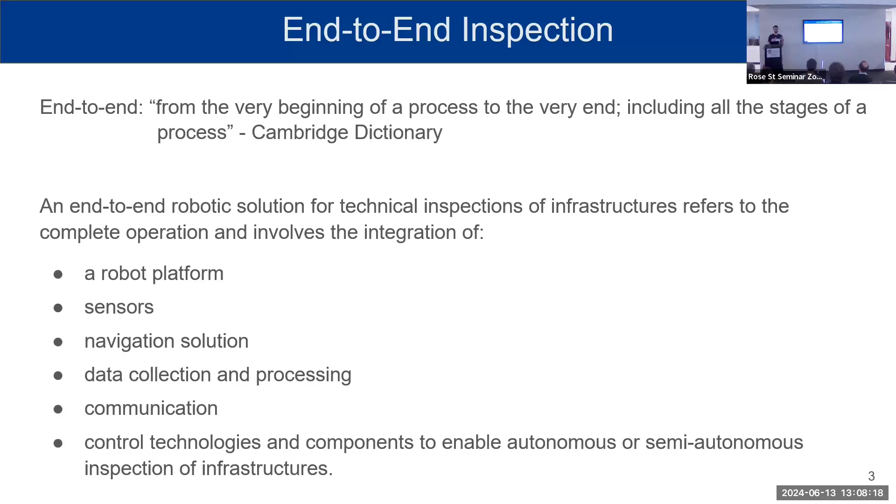If we look at the Cambridge Dictionary, end-to-end refers to something from the very beginning of a process to the very end, including all the stages of a process. In the context of end-to-end robotic solutions for technical inspection of infrastructures, it refers to the complete operation from the selection of the appropriate platform, sensors, and so on. It's also about designing the right navigation and control solutions and how to efficiently and reliably communicate between the platforms and the surveyors. So it's really about having all the components of the solution together.

More precisely, for ship hull inspection, it again starts with the selection of the appropriate underwater vehicle and sensors. It includes all the data collection methods and processing in order to correctly document the hull condition and the structural integrity of the hull. Similarly, it's also about establishing the correct communication links between all the actors during the operation: the autonomous agent, the surveyors and operators. And it finally ends with a way to support and assist the surveyors in decision making by creating reports about the condition of the hull.

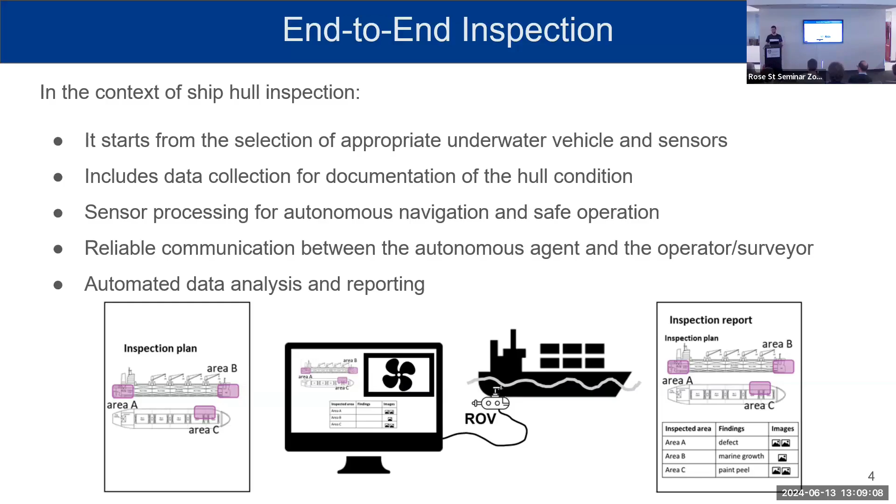So very briefly, I will first talk about why we actually need to inspect ship hulls underwater, then provide some objectives and results, and finally some conclusions with potential future work.

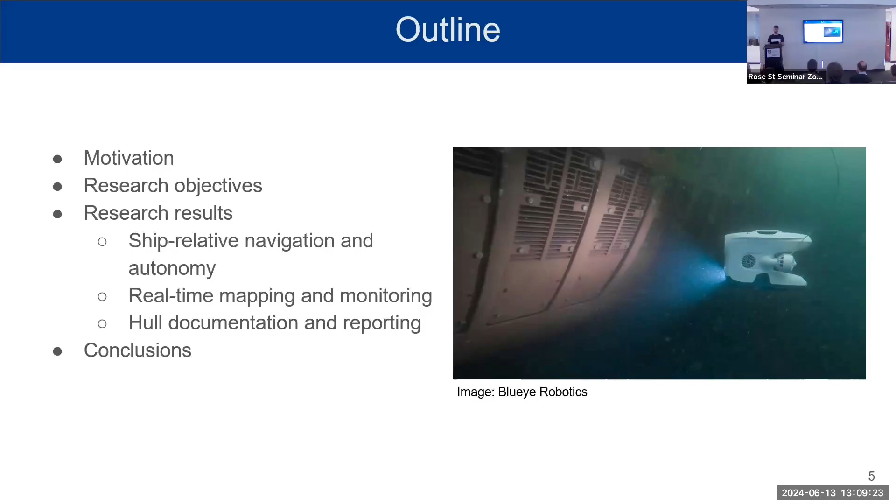For the motivation, as you might know, today there are approximately 56,000 medium and large ships navigating the world's seas, and they compose the maritime industry that has become a crucial part of the world's economy. According to the United Nations, more than 80% of global trade relies on ship transport. But when we refer to the shipping industry, we also refer to most of the activities done at sea, which also includes the transport of people, products, or goods.

And the ship owners are required by international regulations to perform regular inspections. This is because when the ships are navigating around the world, they are exposed to the environmental conditions of oceans, which can be very harsh to them, and over time can lead to structural degradation, such as cracks or biofouling, which really impacts the operations.

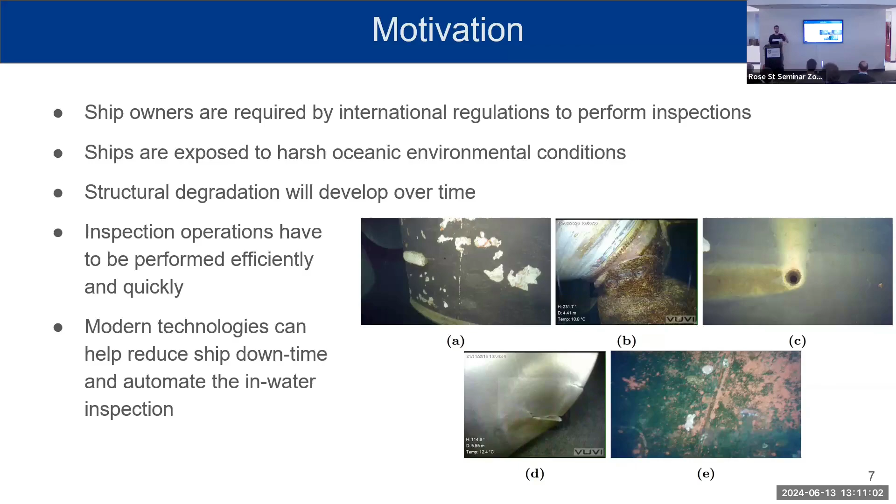Traditionally, the inspections are done in dry docks, which take a lot of time and cost a lot of money. So there's this need to improve this process so that it can be made more efficient and quicker. Luckily, with modern technologies, we can help reduce this downtime of the ships by automating the in-water inspection. But of course, there are a few challenges that come with it.

First, because it's underwater, it can be very challenging sometimes just to navigate and to account for the weather and all these things. But also because there is a very large variety of ships. If we want to provide a solution that can work in practice with many different ships, we have to consider that there's not only one ship with one size and one shape. We also want to comply with the rules and regulations from international organizations so that the solution can actually be used by surveyors and class societies.

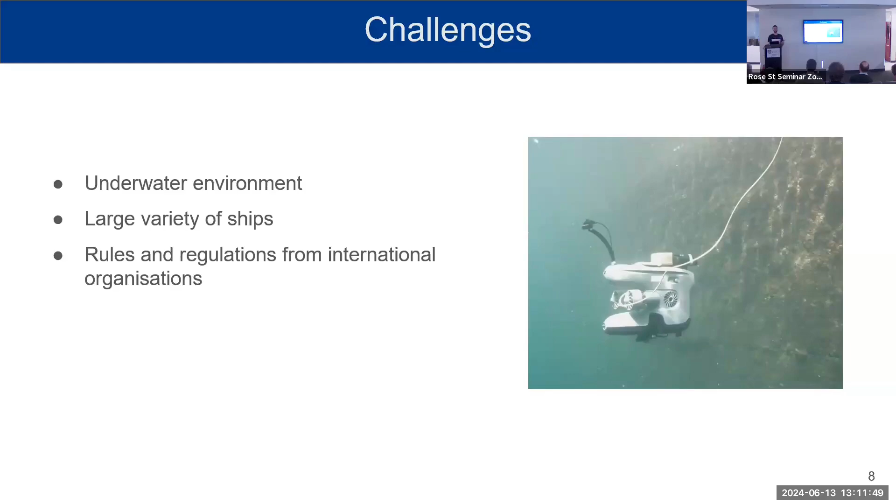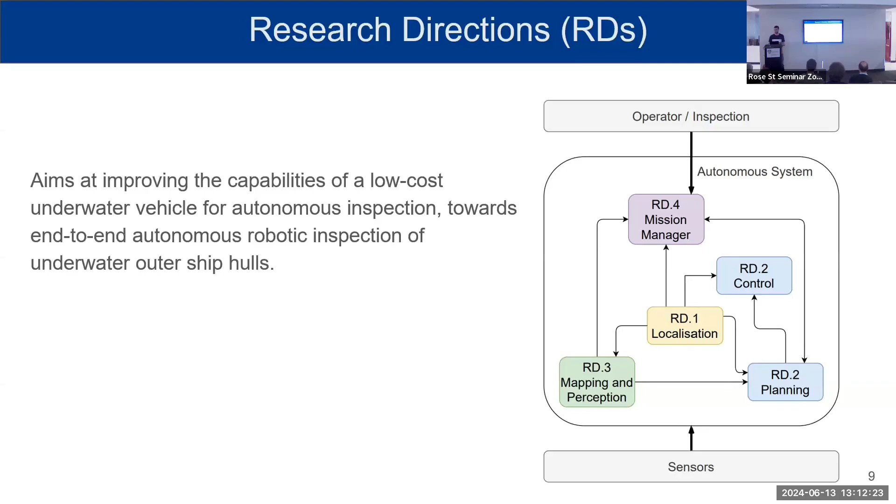So during this project, the global objective was to really improve the capabilities of low-cost underwater vehicles in order to inspect autonomously the underwater outer ship hull. For this, there are several parts that come into play, from the management of the mission to the low-level control of the vehicle to navigate along the hull. We can divide this into 4 different objectives that were my main objectives during my PhD.

First, it's really about planning and control: how can we efficiently plan the path around the ship so that we can fully inspect it? Secondly, it's about detecting the actual faults on the hull and the different ship parts that surveyors are typically looking for. The third one is about providing more insights about the ship parts that we inspect. For this, we try to combine the sensors that we have available, a monocular camera and a sonar.

And the last one is really about creating an end-to-end solution that can be used in practice by the surveyor, so that it becomes possible to monitor, document, and report the hull condition.

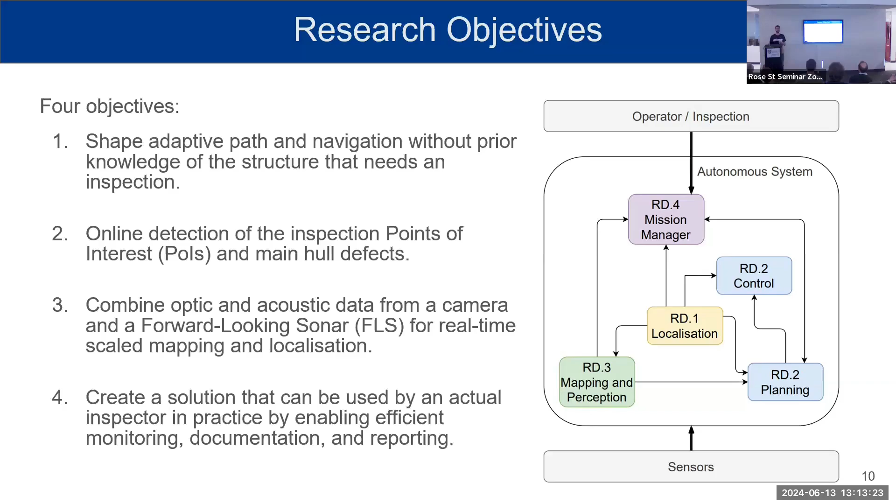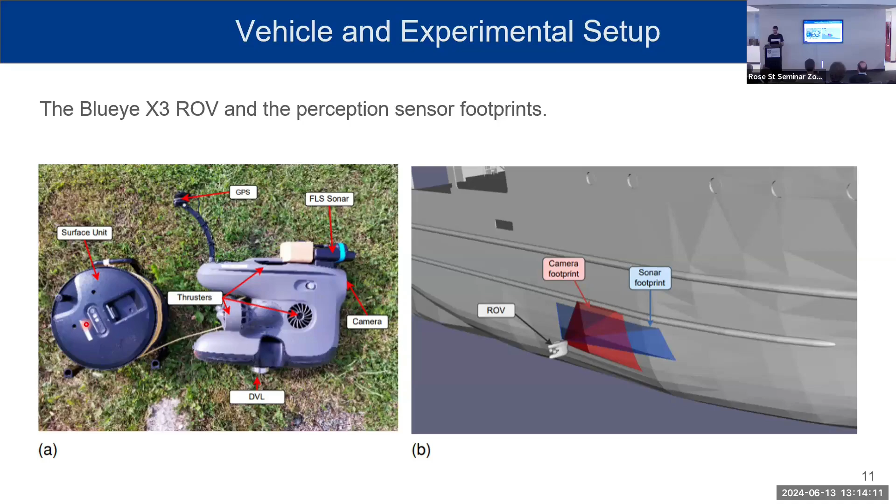Important to note is that the vehicle is connected to the surface unit here, which establishes the connection and communication between the autonomous vehicle and the surveyor. On the right, you can see the perception sensor footprints when it's facing the ship hull. Very briefly, I would like to present what a forward-looking sonar is.

Basically, a sonar works in a specific way. It emits acoustic beams with fixed vertical opening angles. Then it measures the signal strength and the time difference between the signal emission and its reception; by measuring the time of flight, you can estimate the target range. And because it has a beamformer, you can also determine the horizontal angle of each beam. Unfortunately, it's not possible to derive the vertical angle.

If we look at the figure on the right here, we would have multiple beams like this, and for each beam, we would have only one value for each range. So in the end, that's why we obtain the 2D image that we have here on the right.

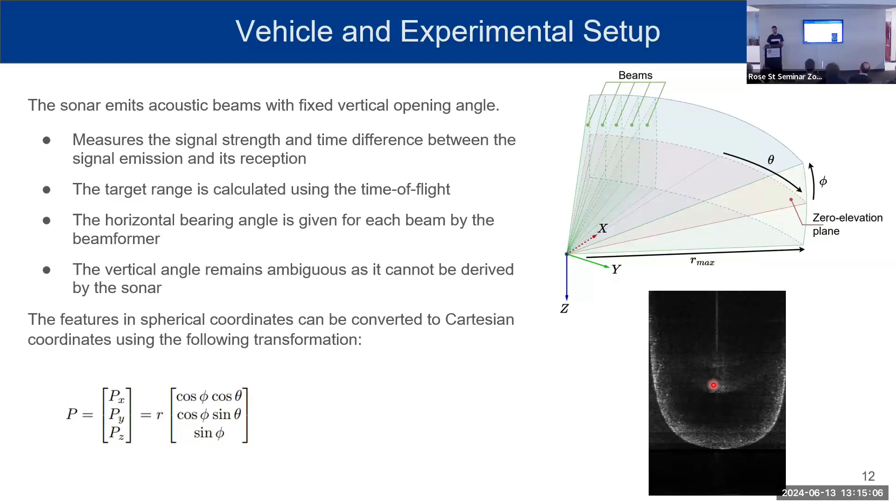Also, during this project, I was very lucky to be able to access many different harbors and ships around Europe. This really enabled extensive testing on many different ships of different sizes and shapes. A few examples: I was able to test in Norwegian fjords on research vessels, but also on cruise ferries in Greece or even a NATO warship in Portugal. This really made it possible to provide a solution that can work and adapt to different ships and conditions.

Right. So now, of course, the first step is to be able to localize the vehicle when it's underwater. So I'll be very brief about this because we actually use an existing framework for this called MaRS, but we extended it for underwater applications by handling more sensors that are related to underwater navigation. But it's actually a very useful one because it handles measurement outliers and outages, which can occur quite often underwater with some of the sensors, but also it provides some online extrinsic calibration of the sensors and some uncertainty measures that we will use later on.

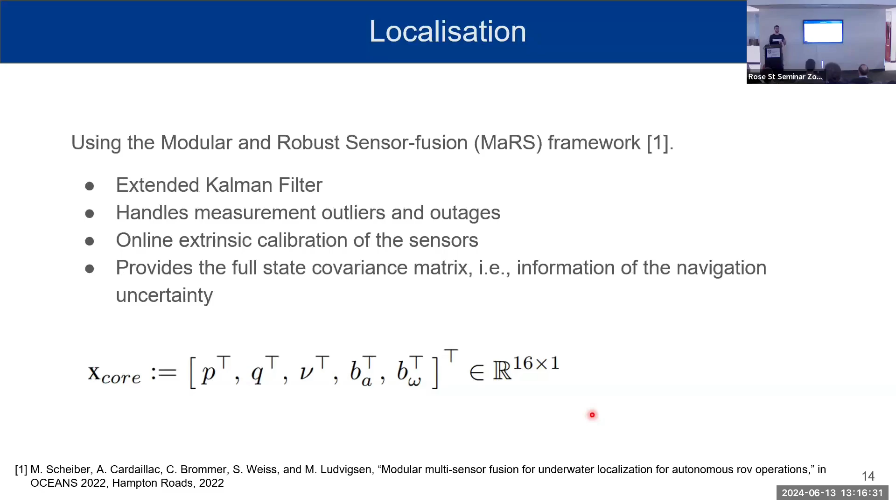But perhaps the most important part here is how do we actually plan a path around the ship so that we can efficiently inspect it. So we have to take into account the constraints. Of course, we want to be able to visually cover the hull so that the surveyor can take note or assess it visually. But the constraints we have is that we don't know the shape of the hull prior to the operation. And also, we need to be always facing the hull and ideally at a constant distance and with a low speed so that all the images we have are consistent.

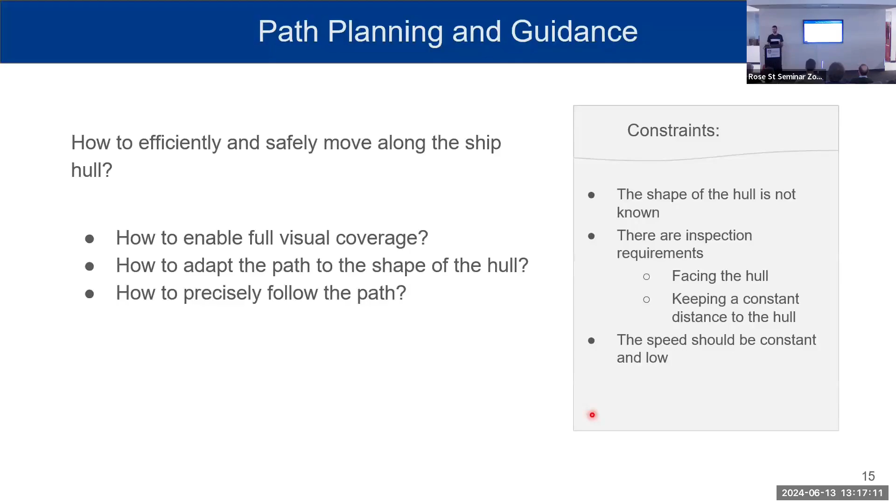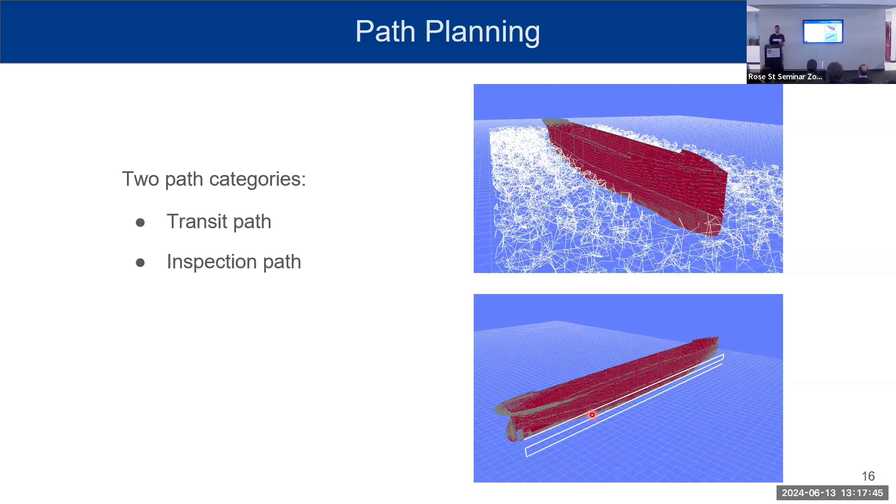So first, we actually define two types of path categories. We have the transit path, which corresponds to the path the vehicle has to follow from the deployment point to the ship, because we want this end-to-end inspection. So as soon as the drone is in the water, we just don't touch anything. So the idea is just to create this path so that the vehicle knows where to go to reach the ship. And the second one is the actual inspection path, so the path the vehicle has to follow to perform the inspection.

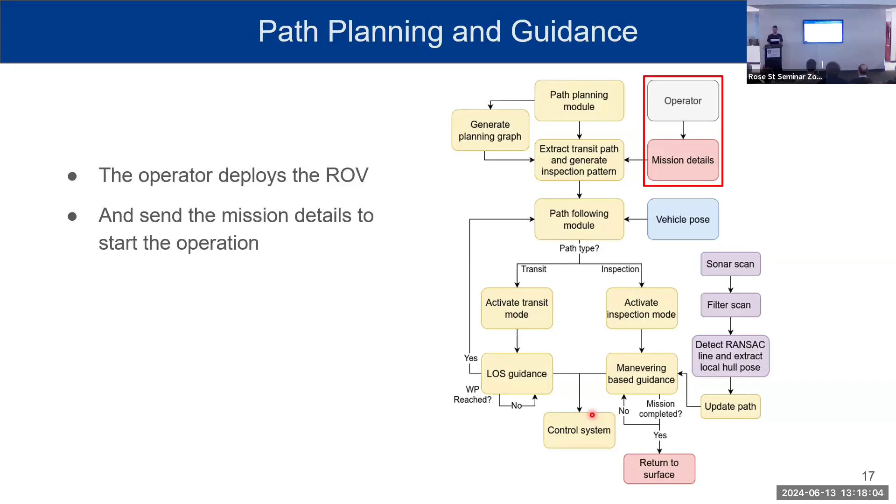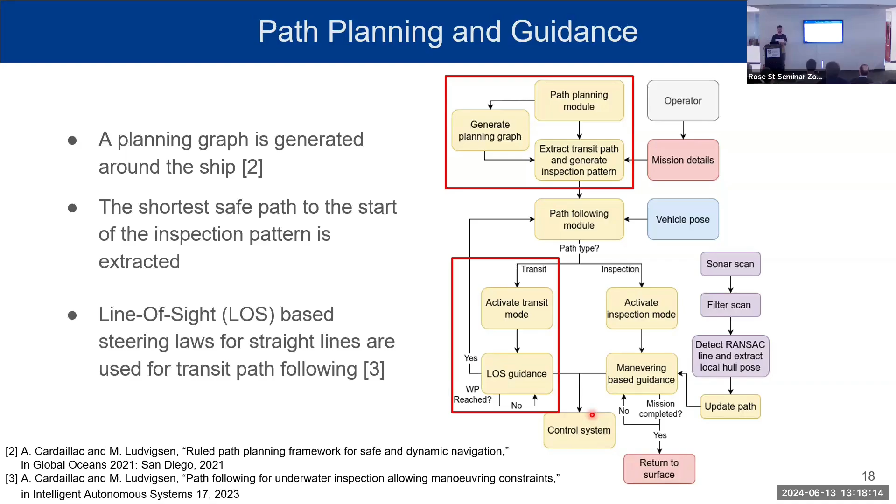So as I said, the operation starts as soon as the operator deploys the ROV and then sends the mission details, which are the location of the ship and the region of the hull to inspect. And then the ROV follows it after generating a planning graph around it that we saw in the video before, and simply extracts the shortest path to the start of the inspection pattern, and it follows it using line of sight guidance. But here, more importantly, is how do we actually plan the path for the inspection?

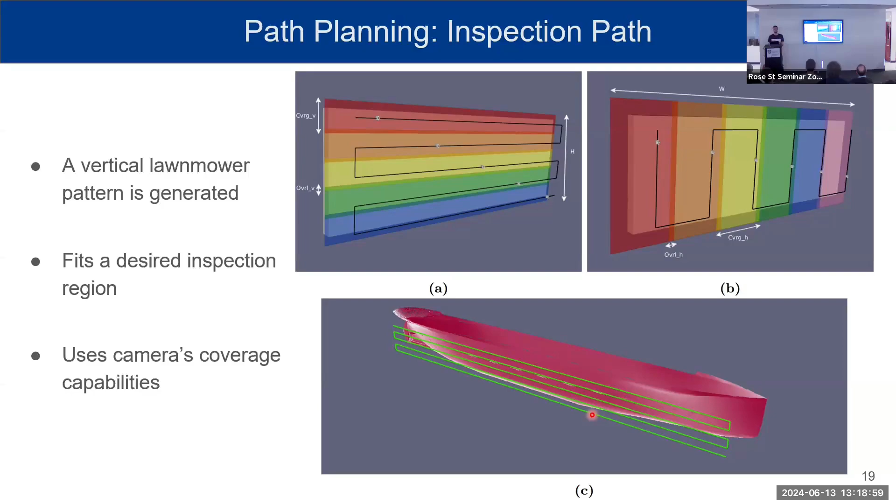So as I said, we don't know the shape of the hull. So first, we generate a vertical lawnmower pattern, with either horizontal slices or vertical slices, depending on the shape of the hull, and depending on what kind of inspection we want to perform. And it's designed to fit the actual desired inspection region and takes into account the camera's coverage capabilities, so that we can have some overlap, for example. But the hull is not flat, right? So we need to update this path as the vehicle is moving. So for this, there is a specific mechanism that is based on the sonar.

So the important part here is the detection of the hull using the sonar. So remember that we have this assumption that the hull is locally flat. And because of this, it becomes possible to say that we should expect an acoustic line in the sonar data. And this acoustic line should provide information about the distance to the hull and its orientation.

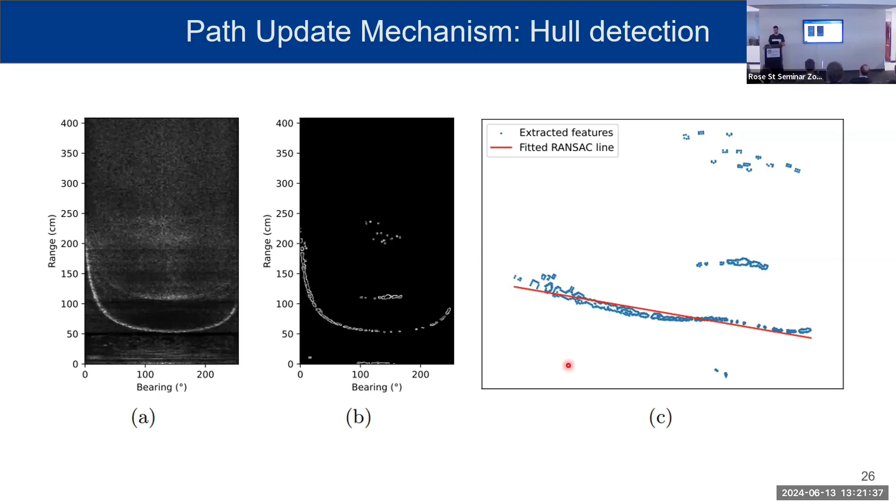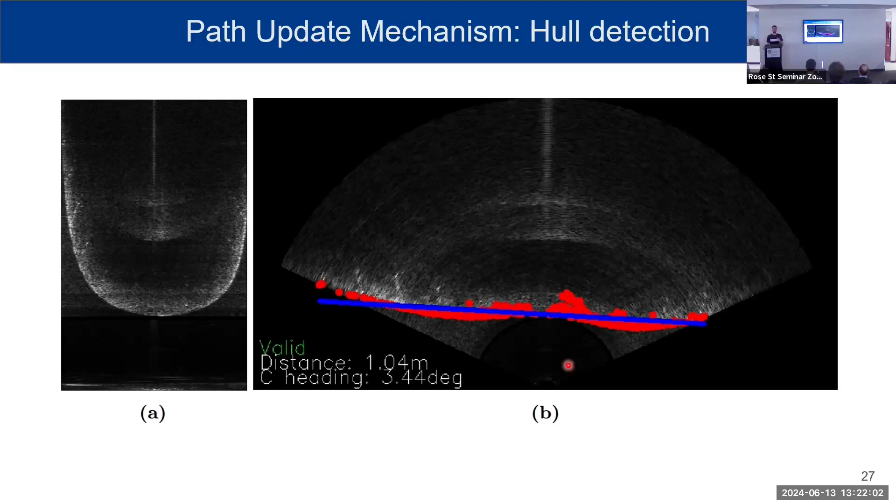So another example here with, on the left, the sonar data, and on the right, how it looks like during the operation. So we can have the raw sonar data in Cartesian coordinates on the right, with in red all the extracted acoustic points, and the blue line is the detected hull. And you can see on the bottom the detected estimated distance and relative heading.

Right. So now, compared to the previous path, we don't want to use line of sight anymore. And that is because we want to have better control at slow speed, but also we need to be able to specify more accurately the speed along the path. And so for this, we use a maneuvering-based guidance, which is based on constant bearing nonlinear approach, which also provides some components to compensate for some of the errors. For example, for inspection, the errors in depth and heading are especially important because we always want to have visual coverage of the hull.

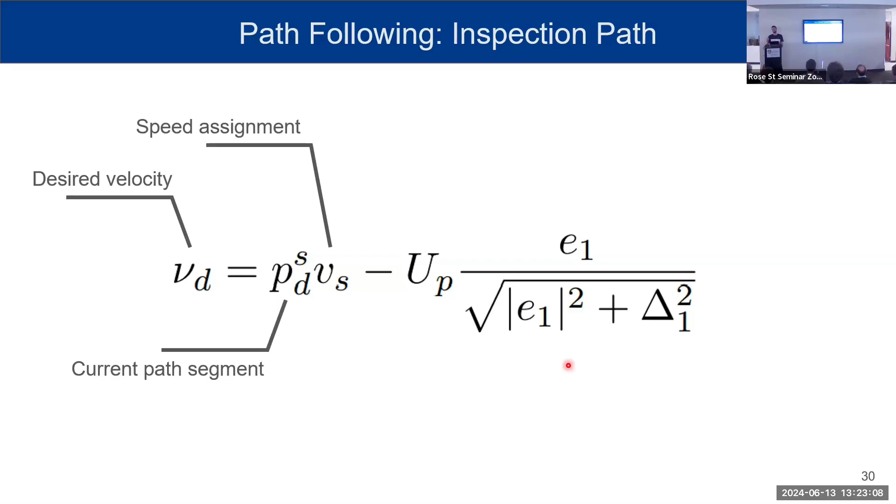So I'll just quickly go through this equation so that you can understand what's the idea behind. So we want to have a desired velocity along that path, which is defined based on a speed assignment, which corresponds to the speed the vehicle should have at each specific point of the path. I will go into details of this specific speed assignment later. And the second part of the equation is the constant nonlinear bearing approach, which is, as you can imagine, based on the position error, because the idea is to have always the vehicle converging towards the path at the same time as it's satisfying the inspection constraints.

So that's why the second part is really important, so that we ensure that the vehicle is always safely on the path. And we have factored to the error the approach speed that defines how fast the vehicle should be converging towards the path.

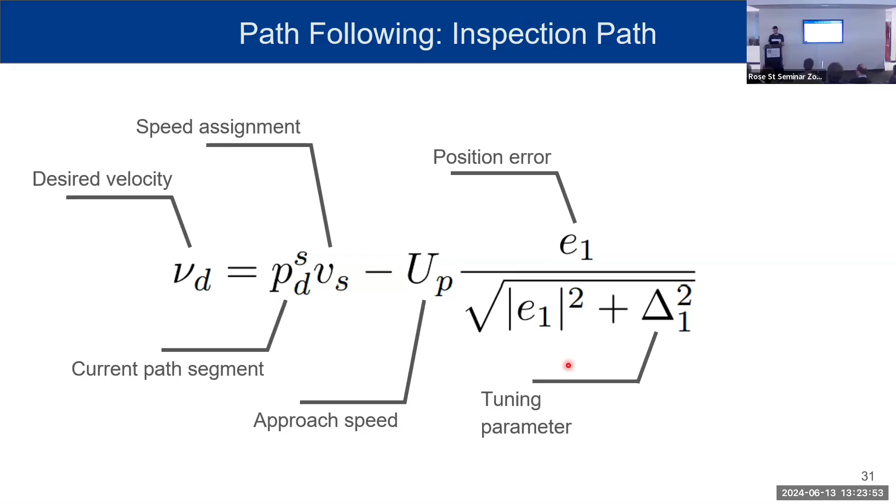So this speed assignment is where we actually take into account the errors, the inspection errors, and especially the errors in heading and depth. So the ratios we have here actually mean that as the error grows, then the vehicle will slow down. And we then have input from the operator, which is the desired speed, which is usually about 0.5 meter per second for typical inspections. And then we have a speed modifier so that the vehicle slows down at corners, for example.

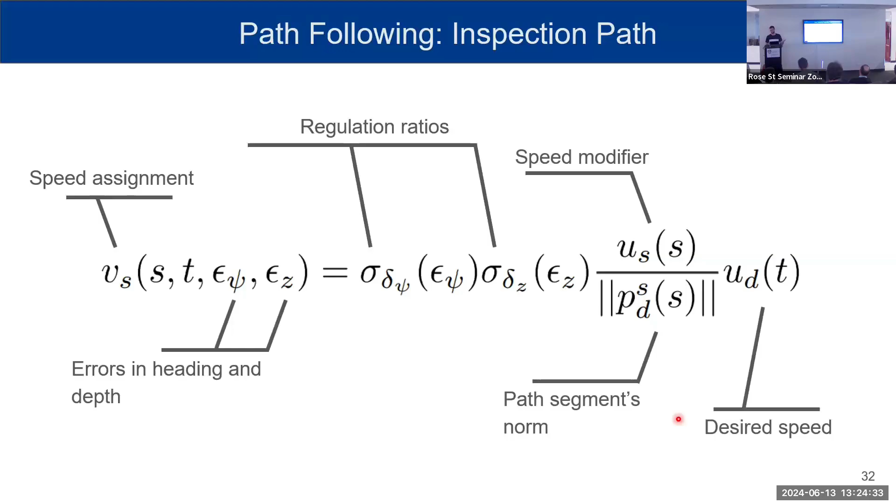Right. So now we can navigate along the shape, but we still need to monitor it and perform the actual inspection. So we want to provide the operators and surveyors that are part of the operation all the information they need to understand the mission progress and also monitor what has been done, potentially what part of the hull is missing. So we really want to provide output data that are relevant for the surveyors.

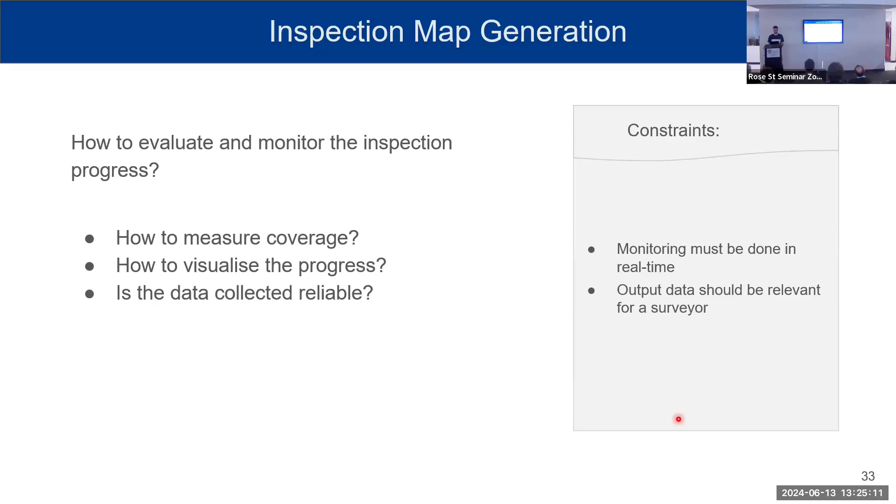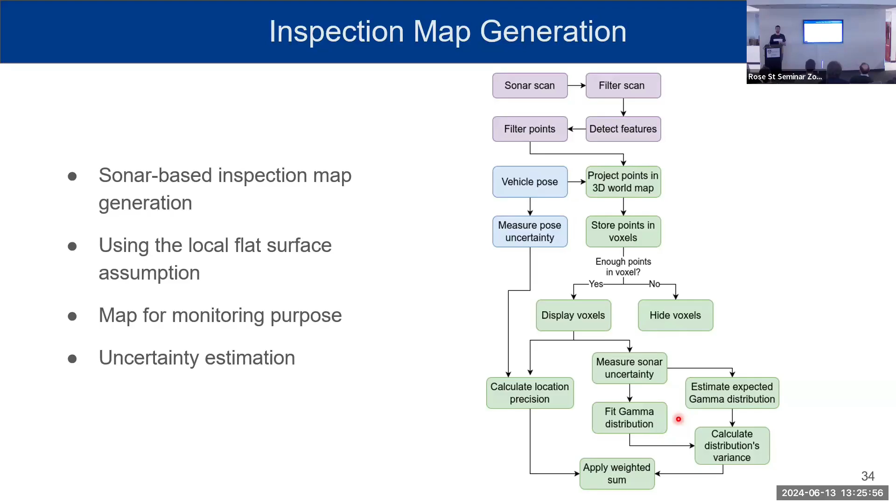So for this, we use only the sonar, and that is because it's a very reliable sensor and works very efficiently regardless of the water turbidity. So it's very convenient in this case, but it also means that it does not generate a realistic 3D model of the hull. It's really about monitoring the inspection and having an idea of the progress. So here again, we have this assumption of the locally flat surface, and we embed in this acoustic map some uncertainty estimation information so that surveyors can better understand the quality of the inspection in specific areas.

So the idea to create this inspection map is that for each beam of the sonar, we select only one feature, the closest one to the sonar. And by doing this, we actually minimize the reprojection error. And this is because we have this flat shape assumption. Because if the surface that is in front of the sonar is flat, it means that the closest point to the sonar is likely to be on the horizontal plane related to the sonar. And therefore, if we project it again in the 3D world on this horizontal plane, then we have a minimized reprojection error. But this only works because of this assumption.

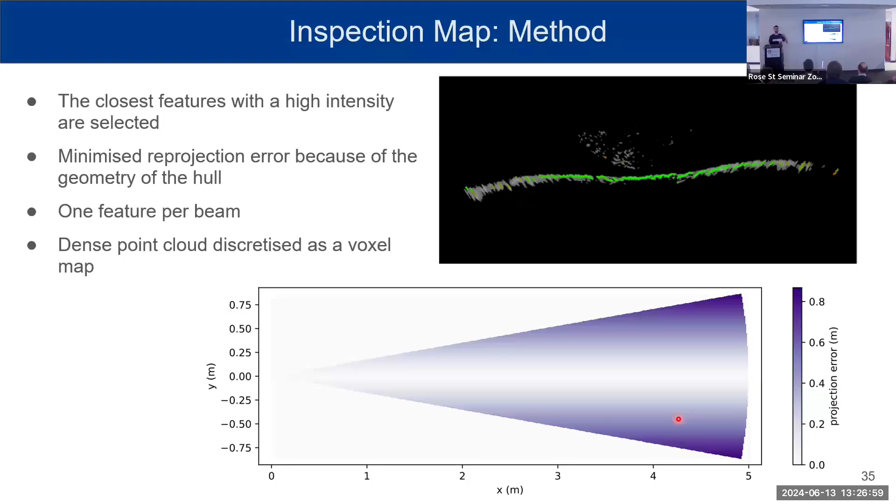And so we accumulate points for each new sonar measurement, and over time we obtain a dense point cloud that we discretize as a voxel map. So here you have an example of what kind of voxel map you can get, with, in addition, the uncertainty information. So we have two sources of uncertainty.

First, the sonar, how accurately we actually are mapping the hull, which is based on estimated ground truths, because before we detected how the hull is positioned relative to the ROV. So it means that we know how the data should look like, and we can extract from this some uncertainty information. The second source is the pose of the vehicle, which is very important to consider, which is extracted from the framework I displayed before. And in the end, because we want only one value, we just apply the weighted sum.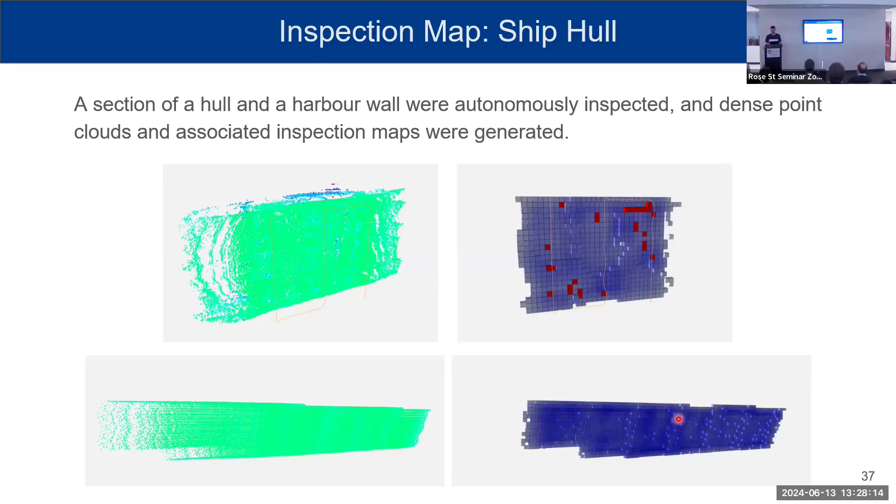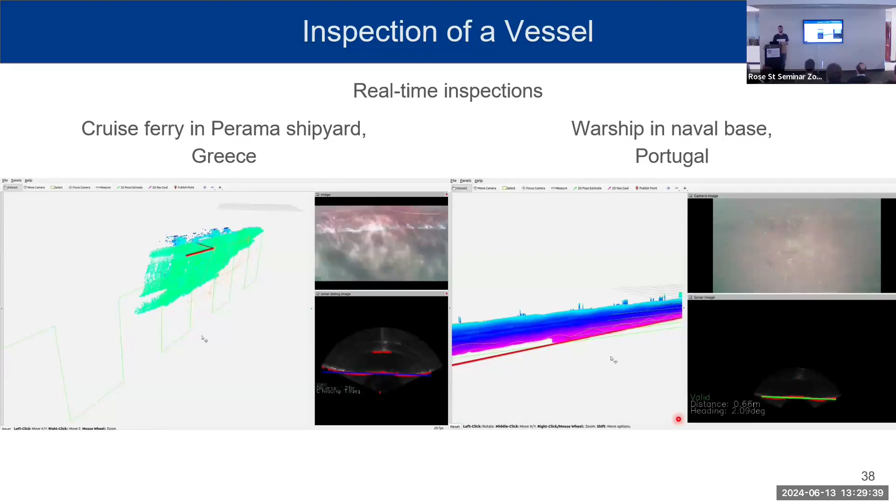The difference between the two videos is that on the right, this was an inspection of a decommissioned warship in a naval base, and we are performing inspection with horizontal slices, which is more suited for that kind of ship because they don't have this curvy shape over the depth compared to cruise ferries. And so the idea is that we can perform similar inspection like this with any kind of hull shape.

So now we start to have a lot of data, but we are still missing one important part, which is the actual detection of defects and faults on the hull. Ideally, we would also want to localize these defects and faults on the different points of interest. So we also want to model specific points of interest and detect them. But we have one issue: we want all the results to be scaled so that they can be used for measurements by the surveyors.

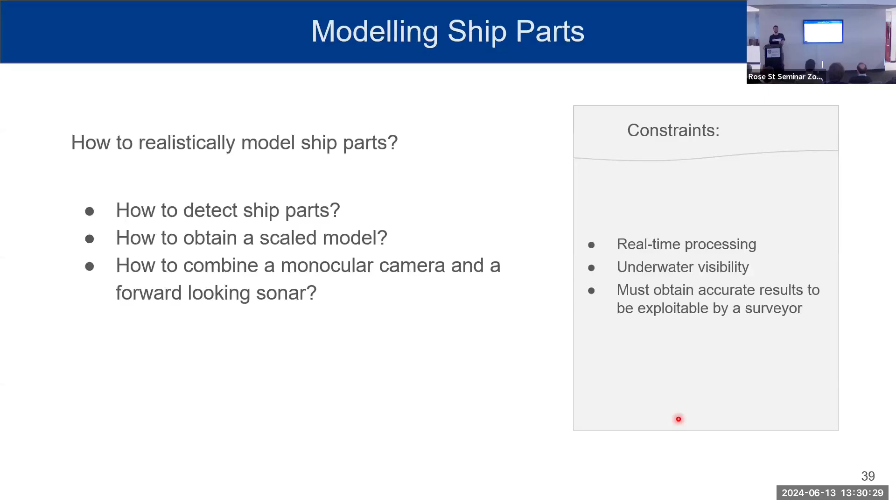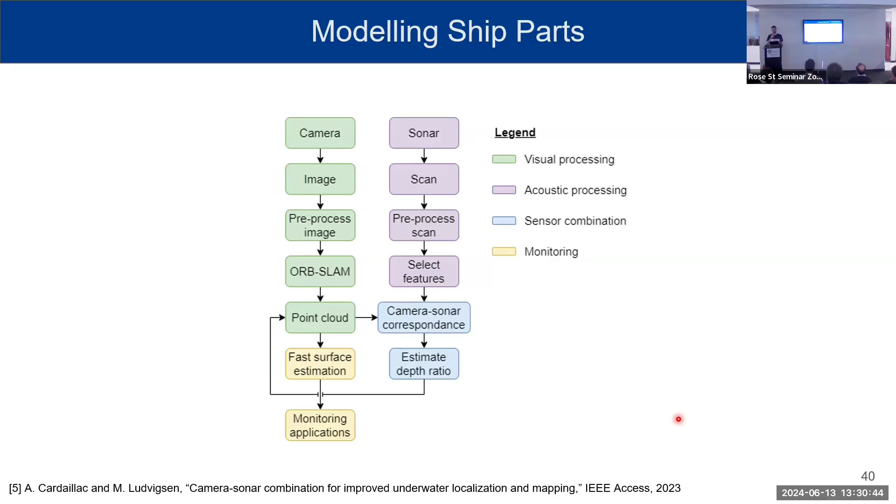And if we only use the camera, we don't have scale. But on the other hand, if we only use the sonar, we don't have a realistic representation of the ship parts. So the idea is to find a way to combine both sensors, to combine the best of both worlds. So first, we try to process both sensors in parallel.

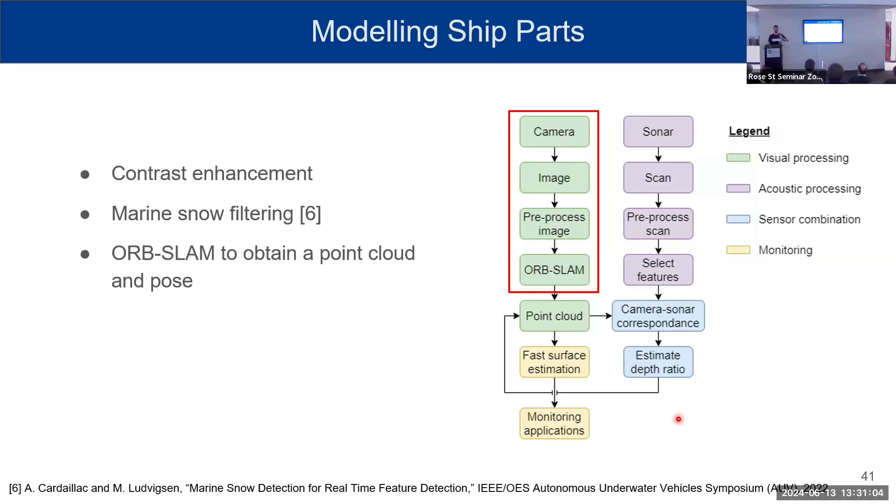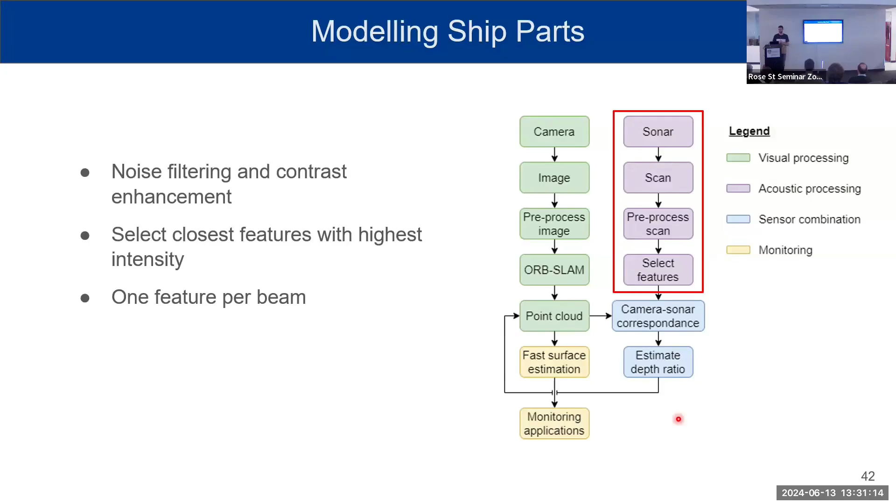For the camera, we perform some contrast enhancement and noise filtering, and then we use the ORB-SLAM framework, or it could be any SLAM framework, but in this case we use ORB-SLAM to efficiently obtain a point cloud and a pose over time. Similarly for the sonar, we first start with some noise filtering and contrast enhancement. And again, we select only the closest features with highest intensity, one per beam.

This time we don't have the flat shape assumption, because if we inspect, for example, a propeller, it's not flat at all. So we have to look more closely at how the sonar is positioned relative to the camera, so that we can have some kind of point correspondence between the visual points and the acoustic points.

If we look from the top-down view, we can see that both the sonar and the camera are horizontally aligned. But from a side view, the sonar is slightly above the camera, which means that the same feature will have the same horizontal angle relative to both sensors, but a different vertical angle. So we have to take this into account.

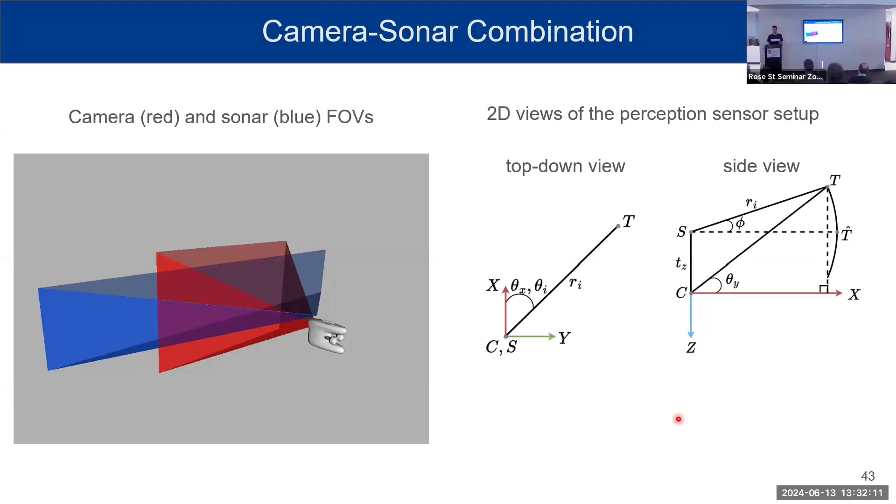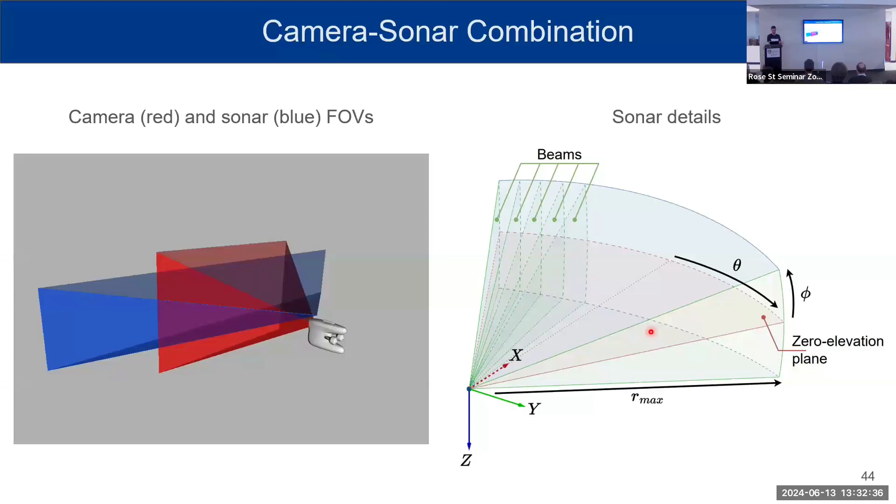I just put this figure back here so that you can remember the geometry of the sonar. Because we select only the closest feature per beam, we will have only one feature per beam here. We start by localizing it on what's called the zero elevation plane, and the idea is to restore the elevation so that we know where it is on the beam.

So how do we do this camera sonar correspondence? First, because we selected only the closest acoustic points, we do the same operation with all the visual points we have. So we take all the 3D points of the point cloud, and of the closest points of this point cloud, we only keep the 2D correspondences that are located on the segment. And then simply by checking all the distances, we can have matches between the acoustic points and visual points.

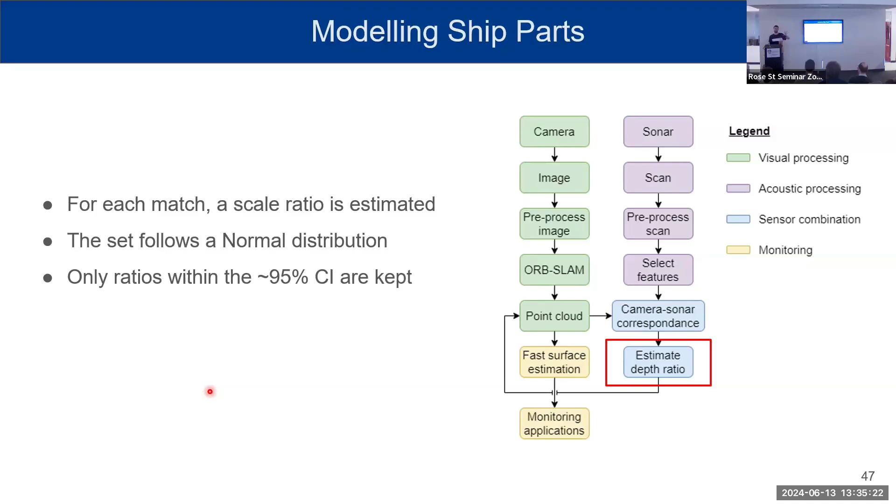So we still need, in the end, to obtain one global ratio to restore the scale of the point cloud and the trajectory. So for this, we use the maximum likelihood estimation, which is known to be robust as the data grow larger. And because we have the data set that accumulates for each new frame, we in the end obtain a very large set of data.

And we also did some comparison when we use multiple beams of the sonar and only one beam, the central one. And similarly, there are stability issues with the single beam. So with this global value that we have in the end, we can just apply it to the obtained point cloud and trajectory so that we obtain a correct scale value that the operator can use to perform measurements or simply for the safety of the operation.

So we tested this and compared this to multiple frameworks, SLAM-based frameworks, such as visual inertial SLAM, but also monocular SLAM and DVL-based dead reckoning. And we could see that for most of the metrics, using the sonar actually improved the results quite a lot.

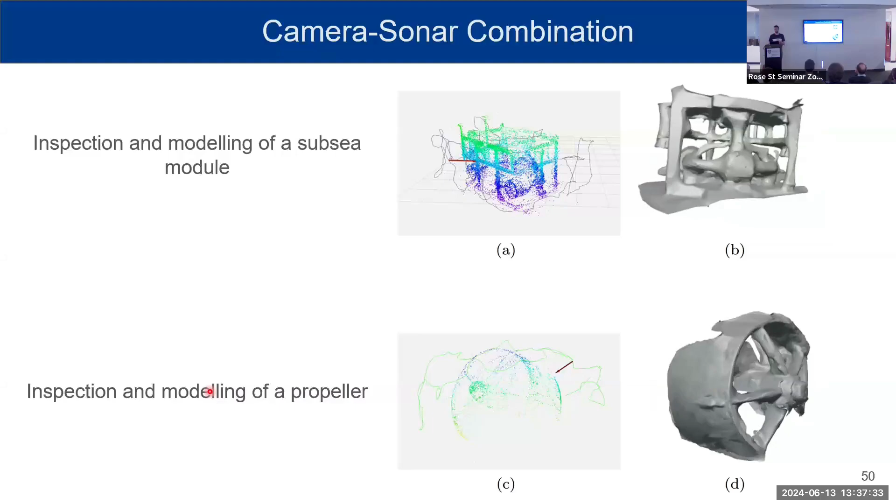So that's great. We have models. We are now able to model all the different points of interest, but we still need to detect the actual faults and defects on them, if there are any. And we want to do this because it's an important step to automate the hull condition assessment. And this will definitely help the surveyor for the decision making.

But unfortunately, there is very limited publicly available data for this, so it can be challenging to train models. But to overcome this, we actually made the first large-scale data set for underwater ship inspection. And it includes 10 object categories with 6 ship parts and 4 faults. And they were selected based on reviews with domain experts, surveyors and societies, so that we know for sure what they are typically looking for, and can only extract the important information.

So for example, for the ship parts, we will look at propellers, anodes, sea chest gratings, and overboard valves. And for faults, the main categories are corrosion, marine growth, and defects.

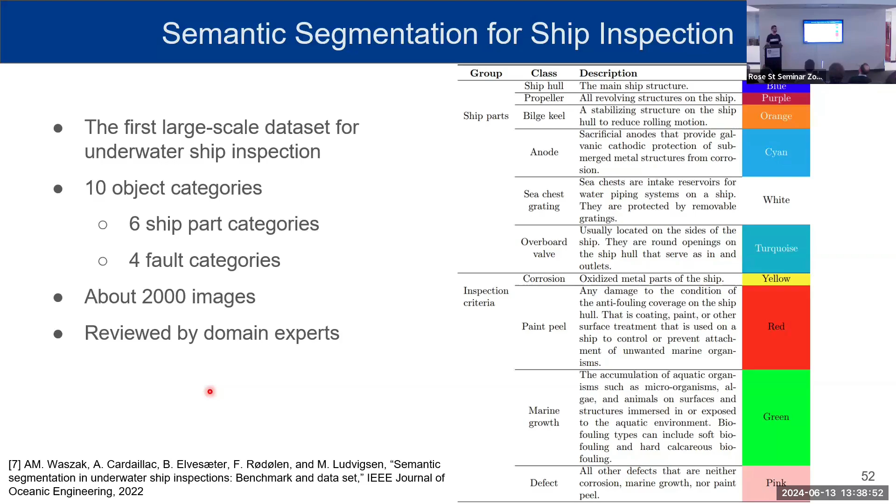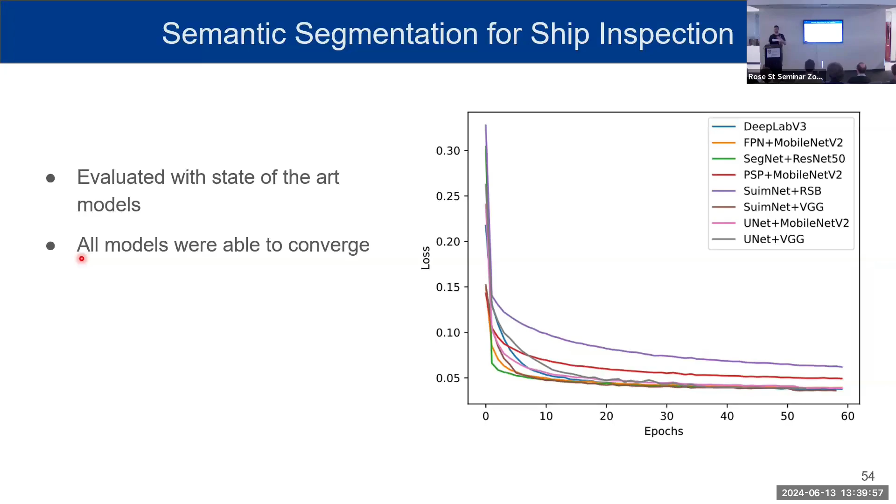So we just use a bunch of state-of-the-art models, and we first check if all the models were able to converge, which was the case. But that's not enough to really say the dataset is good or not for models. So then we use the same models, and we train them and measure the popular metrics for semantic segmentation, which are IoU and F1 score, and we could observe that they could reach high accuracy.

So up to now, we have accumulated quite a lot of data that can be used for many different applications. But what do we do with this data? How can we use it to actually help the surveyor? So the idea now is to find the appropriate way to aggregate all this data and potentially generate reports that can be used by surveyors. And we also want always to comply with the international regulations so that the solution that we propose can be used in practice.

So for this, we identified 3 different types of data, which is actually quite often also used in the guidelines for ship inspections. We first have navigation data, which correspond to where is the ROV, how is it moving, its path, and so on. We have the scene data, which is, in a way, what is the data observing and the different models. And finally, the inspection aiding data, which would support the final decision of the operator. So, for example, if there is an actual fault.

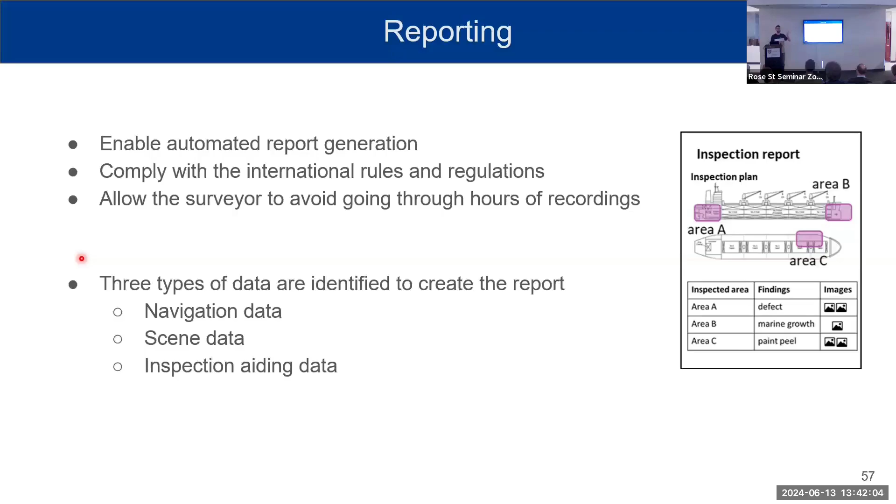So this is then the very last step of the operation. When the ROV is back on board, we generate these kind of status reports, depending on all the points of interest that the surveyors are looking for. So as soon as the semantic segmentation model detects a ship part, it kind of creates a landmark in the data sets, so that then specific status report can be generated at the specific location.

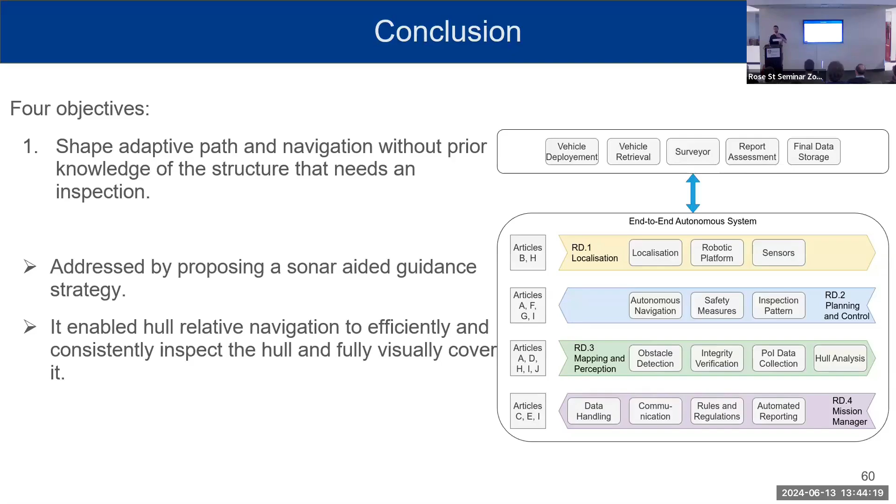So to conclude, at the beginning, we had these 4 objectives. The first one was about making sure that the vehicle can adapt to the shape of the hull and navigate along it, regardless of its shape and size. And for this, we have a sonar-based guidance strategy to enable to fully visually cover the hull. The second one was about detecting the actual points of interest and faults. And for this, thanks to the help of different domain experts and facilities, we were able to propose a new data set.

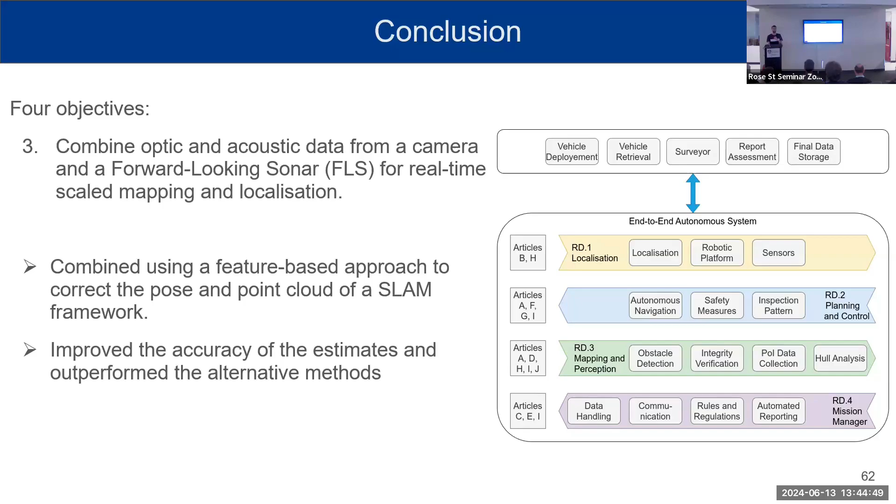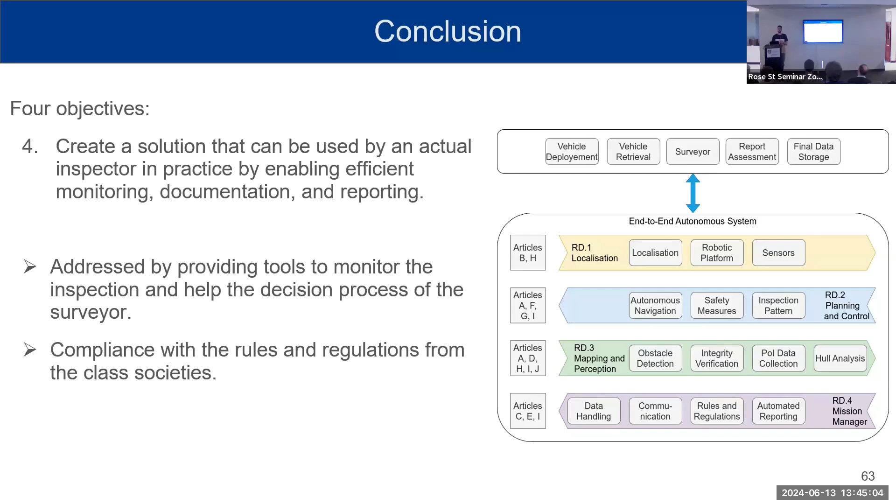After this, we also wanted to model the different ship parts to provide some better understanding of scale. And for this, we proposed a way to combine sonar data and monocular camera. And finally, it was also about creating this global solution that can be used in practice by surveyors to better and more efficiently report, document, and monitor the inspection. So the very last conclusions.

I think this really contributes to the progress towards end-to-end autonomous inspections, but also thanks to the extensive testing that was done during my PhD, we were able to prove the potential of such end-to-end tasks because we were able to collaborate with actual surveyors that were sitting literally next to me during the operations. So this was very valuable, and we were able to have feedback about how in practice it's actually done. But we still believe that such end-to-end tasks need to be more explored, and there's a lot of room for improvements, of course.

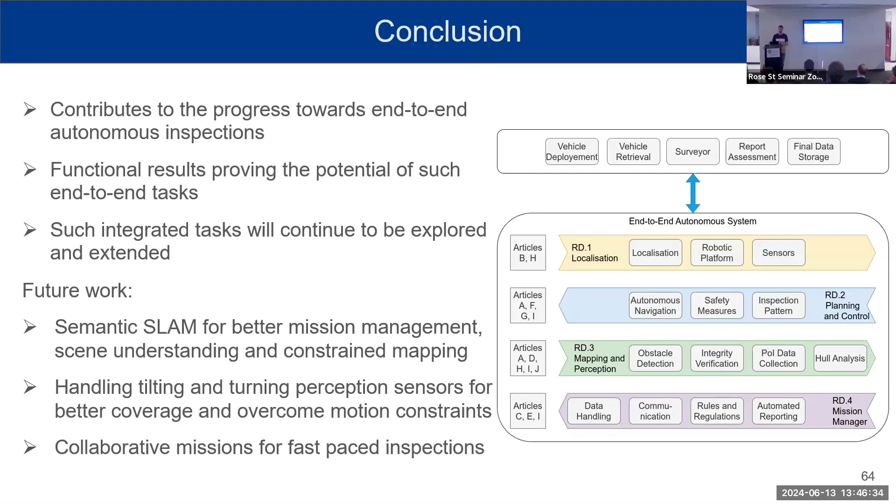So, for example, I believe that semantic SLAM would be very valuable in the context of inspection, especially because it helps for mission management, scene understanding, and more constrained mapping. But also very importantly, specifically about the sensors, being able to handle a tilting or turning perception sensor would really help achieve better coverage more quickly, because this would also overcome the motion constraints that some vehicles might have. And finally, of course, collaborative missions are definitely relevant for fast-paced inspections.

So, yes, thank you very much. Thank you, Alex, for a great talk. Do we have any questions in the room or online, please? Well, I can see Stefan has his hand up. Steph, do you want to unmute yourself and speak? Actually, I was just doing a little clappy icon thing, but I can maybe start questions off.

So, that sort of combination between sonar and visual data is particularly challenging underwater when you've got turbidity and the like. So what are the most significant challenges that you came across in combining those modalities, and what are your thoughts on ways forward?

Yeah, so definitely the water clarity is the biggest challenge, but that's why combining with the sonar is especially relevant, because the sonar is not affected by the water quality. So if we find a way to extract just enough points from the camera images, then the remaining acoustic points are actually enough to provide accurate and robust results. But finding a way to improve the images as the operation is happening would definitely help provide more insights and more relevant information for the fusion, but also for other inspection tasks. Thanks.

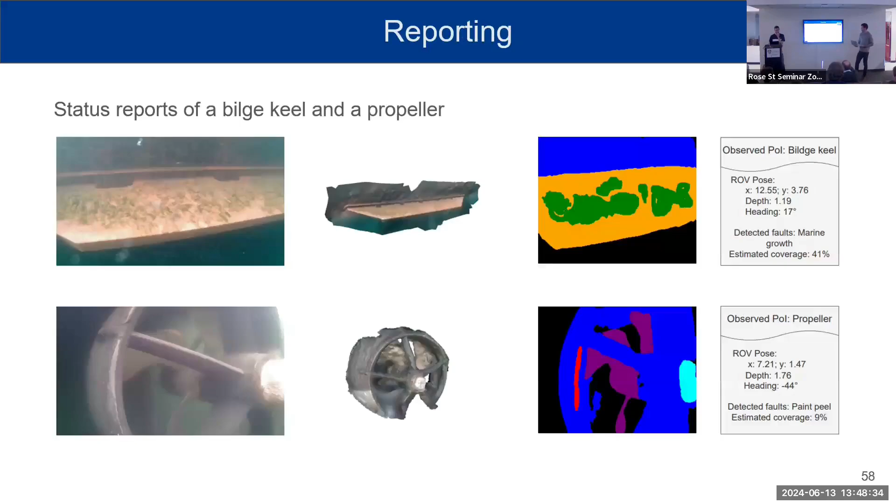Yeah, thanks, Alex. Awesome presentation. I have a question. So you've got this template lawnmower pattern, and then it tracks more accurately the shape of the hull using sonar feedback, right? I'm curious about robustness or resilience. If your template had a lawnmower pattern that was too deep for the size of the hull, and you went off the bottom of the hull and lost track of it, and you're just in open water, what would it do? Is it resilient to that? Can it regain track?

Yes, actually, when we tested, this was an issue that we had multiple times. So the idea is that as soon as we lose track of the hull, we would come back to the last place where we had the hull in view. And then based on this, we would update the path. But this came only quite late in the PhD. So for the majority of the project, we just made sure never to go too deep.

Right. And to navigate back, is that just based on IMU dead reckoning or something? You don't have any extrinsic navigation information there? Well, we keep track of the vehicle's position. So let's say we are 3 meters deep, we are still able to track the hull. But as soon as we get to 4 meters, for example, we lose track, and we just come back to 3 meters and continue from there. Okay, okay.

So continuing with what Ian said, I think it's an interesting problem to see, in the case of a moving hull, the robustness of the motion planning algorithm. For example, in the pool, I don't know if we can assume ideal conditions, or in general, with the inspection procedure, I guess we can have a pool with no waves at all. So I don't know.

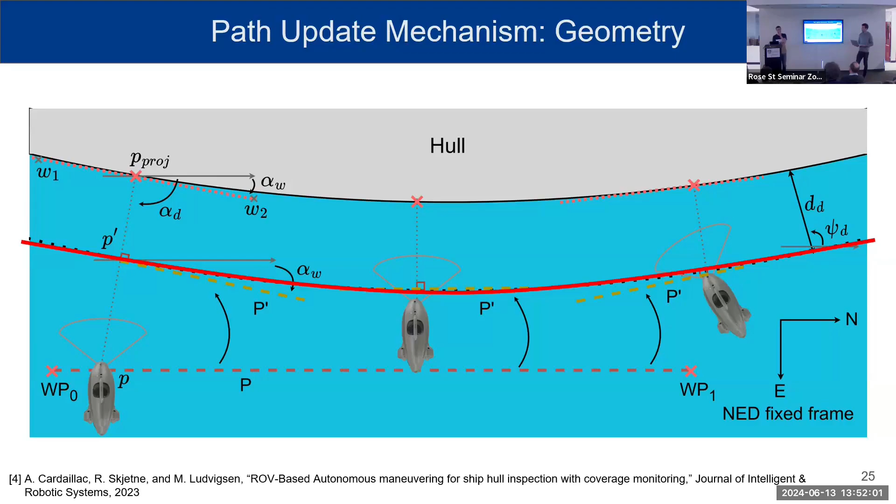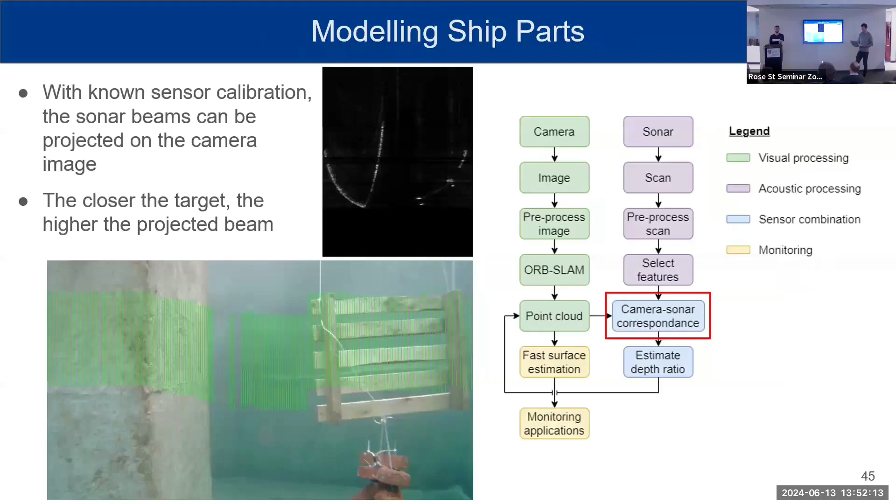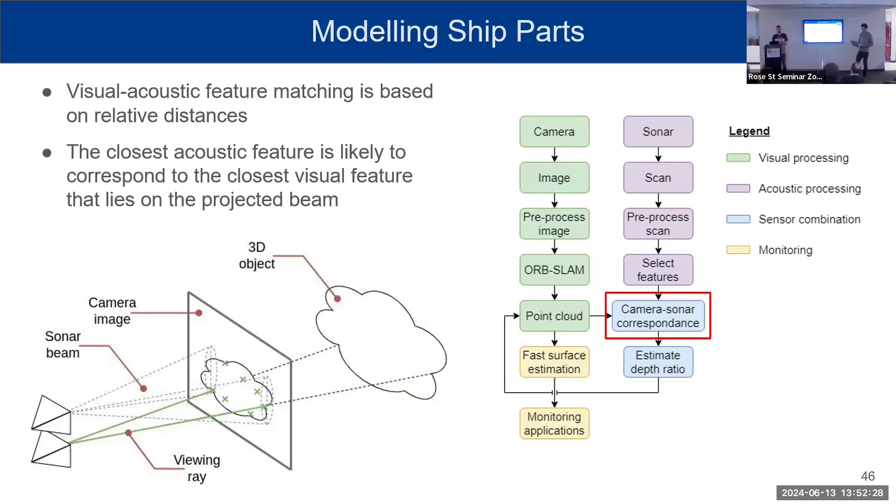Thanks for the talk. I had a question about the way you were combining the scale you were getting from the sonar with the reconstructed point cloud. From my understanding, you were scaling it every frame because it seemed that you were able to feed your scale back. We actually obtain new measurements every frame. And so we build a data set over time that has scale values for each of the different matches. And then from this data set, we obtain one specific scale, which is then applied to obtain this kind of trajectory. So this process is offline? No, this is online.

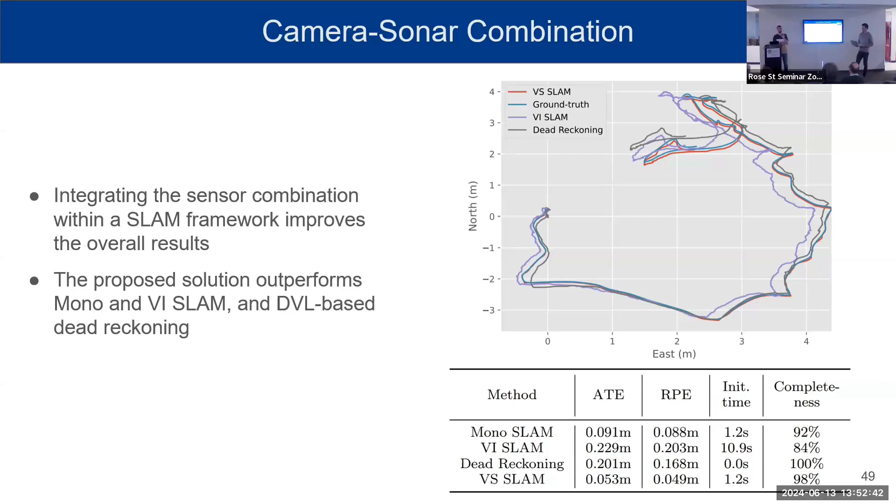But the thing is, maybe the first few frames it won't be so stable. But because the idea is to converge towards one, which means that we have a stable scale, it actually doesn't really change, except when we have a strong change in the scene. Okay. All right. Thank you.

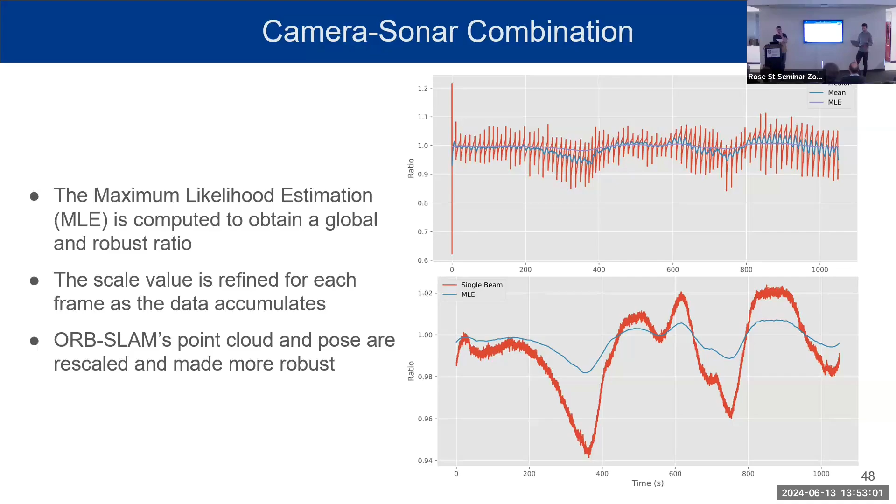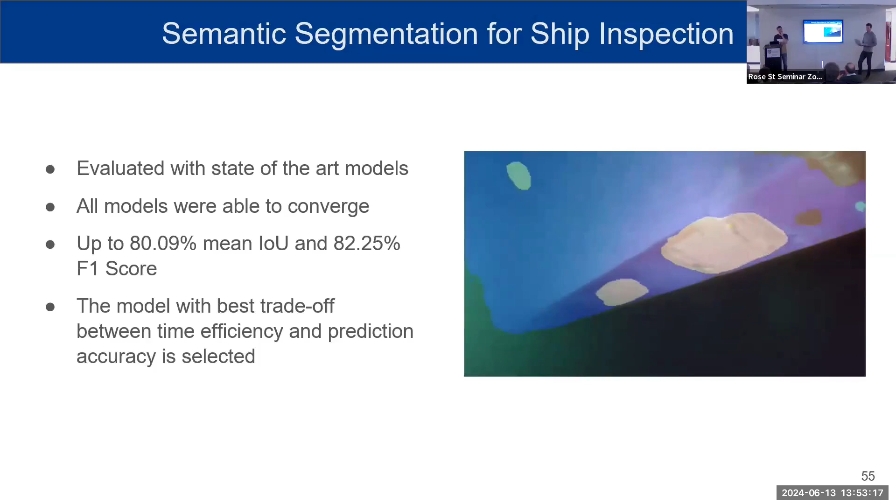I have another question. When you showed the semantic segmentation results, the actual video, this one. Obviously underwater is a very challenging environment, probably more challenging than most scenarios where semantic segmentation is used, right? And it looks like you're doing just frame by frame semantic segmentation. So you got flickering, things change their semantic label from one frame to the next quite a lot. I wonder if you've thought about accumulating information over time, linked with the SLAM solution, to stabilize the semantic labeling here.

Part of the project, not part of my PhD, but there was a master thesis working on this, where the idea would be to use frames one after the other so that you can propagate the mask and have this kind of stability. This actually had quite good performance.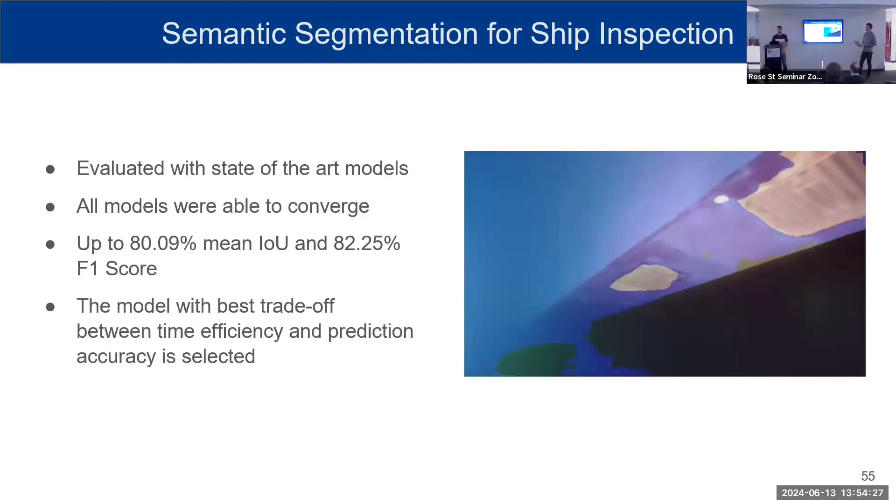Maybe one thing that I can mention with this data set is that most of the images were collected in Norwegian seas, which means that, for example, if we go to the water here, it wouldn't work as well if we don't add some of the images from the water here. So this is also one of the issues with these data sets, but we still think that it's a good base that everyone can use and extend. So we should add to the data set through ARIAM, right? That's what I'm saying. Maybe.

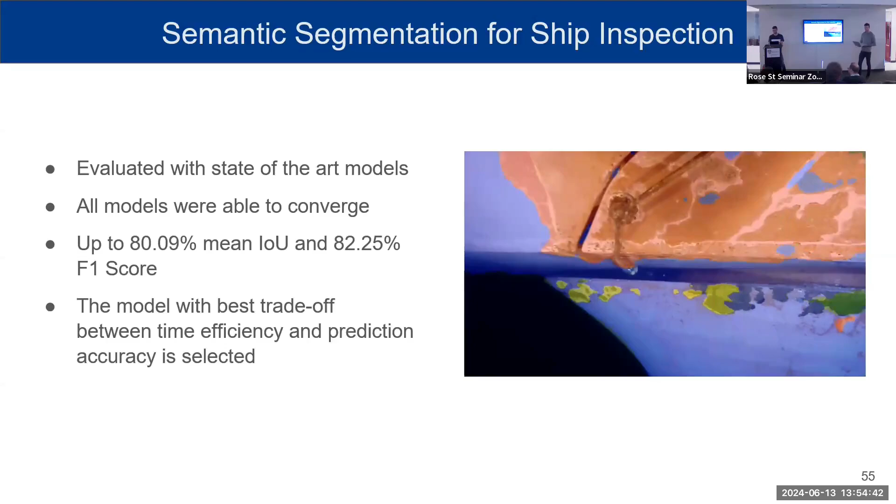Sorry to jump in, but Alex, a lot of what you talked about, I guess, is mapping. Was there much work done in the broader project that connected this through to intervention, where you're starting to do some kind of task on the hull, whether it might be cleaning or painting or non-destructive testing type things, where you're actually trying to close the loop and getting the robot to do something around the structure? So yes, it was not really part of my PhD, but an extra in a way.

We are actually investigating the way we could put some kind of probe on the underwater vehicle to do some NDT. So the idea would be, using this data set, when we locate the relevant places where we would need to do some NDT, the vehicle would approach and perform some tests.

But because this project is actually part of a bigger European project, we had this collaboration with other fleets of robots, including magnetic crawlers that would navigate on the hull. So typically the underwater vehicle would find the point of interest, then the crawler would reach this point, perform the testing, and potentially some maintenance tasks. Great, thanks.